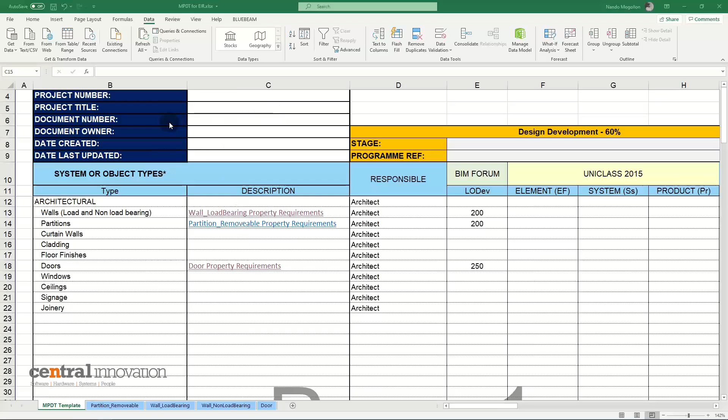So what we have here is a typical MPDT, a model production and delivery table that we've taken from the New South Wales Transport Department, which is publicly available. It's essentially a spreadsheet you can download. This is a fairly simplified version, and the only thing we've changed is we've added a few elements as an example of what the exchange information requirements will be for typical elements.

So right now we're assuming we're dealing with the architectural file, since this is the file we've been playing with. We'll need walls, partitions, and a bunch of other elements, doors, and so on, and they all will need certain requirements. The level of detail required is going to be 200, but that's only at design development. Later on that can change, and so on.

And they may require, let's say, a Uniclass classification system. This could be anything else — every country will use different ones. In Australia we also use NatSpec, and in New Zealand they also use MasterSpec, if I'm not confused.

And then all these elements will have specific requirements. One of the things I've done already is add those property requirements within the same table — this is very common. So if I've got walls, either load or non-load bearing, I have certain requirements that are actually in a different tab in the same spreadsheet. All I need to do is click on that, and that should take me to that page.

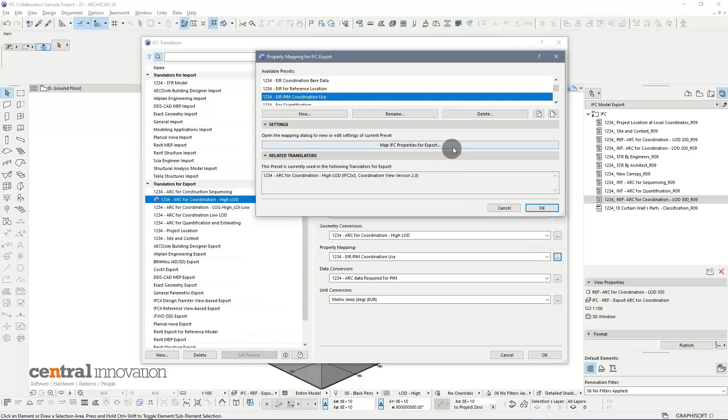So the first thing you want to do is go over to your translators, which I already have a shortcut for right there. I have the one that I've been using for this purpose of exchange for coordination. The one thing I want to focus heavily on will be the property mapping—this is where I control which properties will be mapped into the IFC. Click on the definition, and here we are.

Let's start with walls in this case. What I've got here is a list of all the properties available within the property set wall common. We're specifically looking for, well, it's 4 of them actually, or with partitions, that's going to be 5 in total. So we're looking for wall common, and the specific properties we want to bring in.

Combustible—whether the wall is of a combustible material; compartmentation status—whether it's part of a compartment for fire and smoke purposes; whether it does extend to structure; whether it's external or not; whether it's a load-bearing wall or not. These are the 5 properties we want to make sure are included.

So in order to do that, what I need to do inside ArchiCAD is go within your translator and then the IFC property mapping and look for those. I have those in here—combustible, it's right there. And the one thing you need to make sure is that this is actually linked to some property inside ArchiCAD.

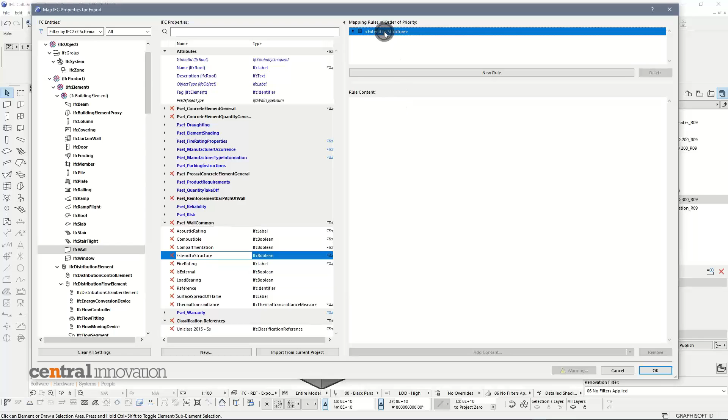Then we go into 2 that are not quite the same: external, whether the wall is external or not, and the load-bearing status. You'll see that they're not mapped in here, and the reason is because these 2 are actual attributes inside ArchiCAD. It might be confusing if you haven't done this before, but essentially for these 2, you don't need to map that manually, because whether the wall is external or load-bearing is part of the essential ArchiCAD attributes. I'll show you that in a minute.

Given this, what I can see from here is that anything with a link like so, including the acoustic rating and the thermal transmittance measure, will also be mapped into the IFC. As a rule of thumb, you normally don't want to throw in stuff you haven't been required to provide. So in a normal project, if I've only been required to produce these 5 particular properties, I will likely just get rid of this other data and make sure we don't overpopulate the model with information that may not have been required.

And we can map that later on if needed. So if you needed to do that with thermal transmittance, I'll just take that, delete that rule, and this particular parameter now won't be part of the IFC because it is not mapped.

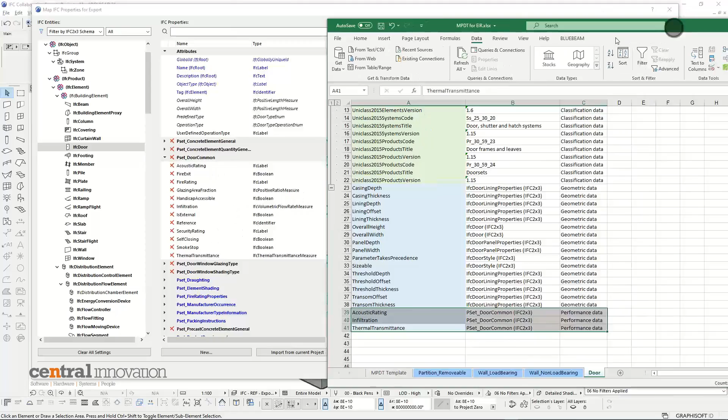You can double check those and map those whenever necessary. We're focusing on the ones that are strictly required by the BIM execution plan through the project information requirements and exchange information requirements. Similarly, I've got the acoustic rating, which is already being mapped to different things, including not only ArchiCAD properties, but other object properties that may require mapping.

Infiltration is similar, although infiltration is only an ArchiCAD property, and the thermal transmittance can be part of the library part or an additional ArchiCAD property.

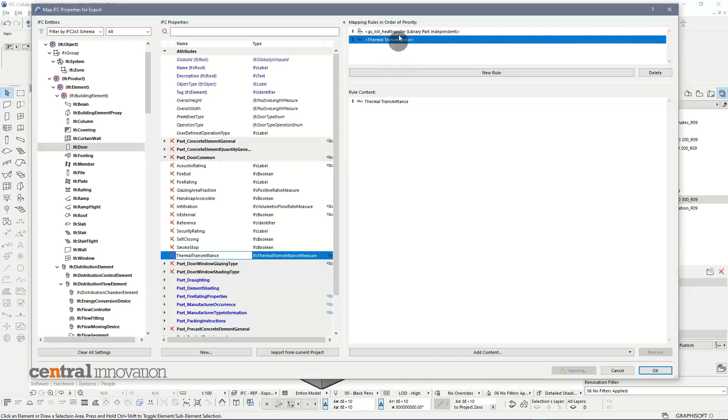When you have several rules in this list, ArchiCAD will try to grab whatever value it can take from the top to the bottom. The first value that populates the property is the value that will be used, so make sure you have the correct sequence for where to look for the value.

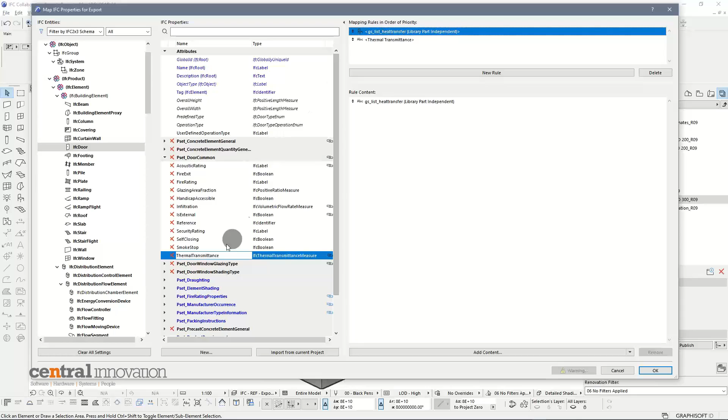Okay, so that's what you have when it comes to properties. If we have that mapped, the next thing that needs to happen to make sure that data comes out lives in the next setting, under data conversion of your translator for export. That data conversion will explicitly state that only the properties that have been mapped will be included.

And essentially that's what I just did - I've been including those specific properties that have been requested to include.

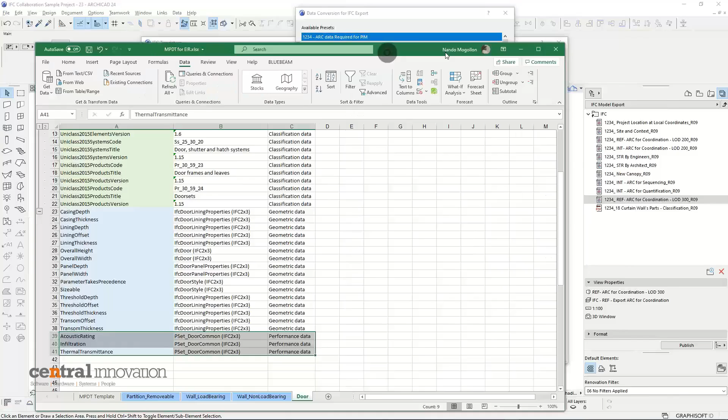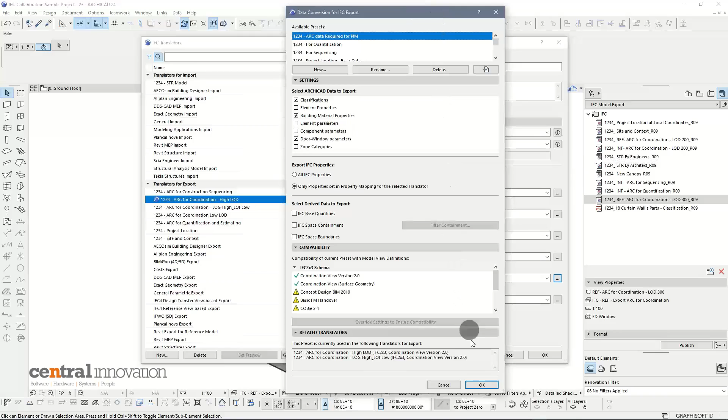Now, when it comes to this additional data, these so-called geometric data, that is included inside ArchiCAD when you simply click the door and window parameters in the case of doors. In the case of walls, they will be included whenever we jump in IFC 2x3, since it's basic IFC data. I'm going to click OK and click OK.

Now there are several ways, now that we've made sure we've got the data included in the translator, you may want to double check on the fly that the information is already there. In order to do that, you need to use the IFC project manager.

The IFC project manager will simply give you a live view of the IFC file with the data that is being mapped using that particular translator.

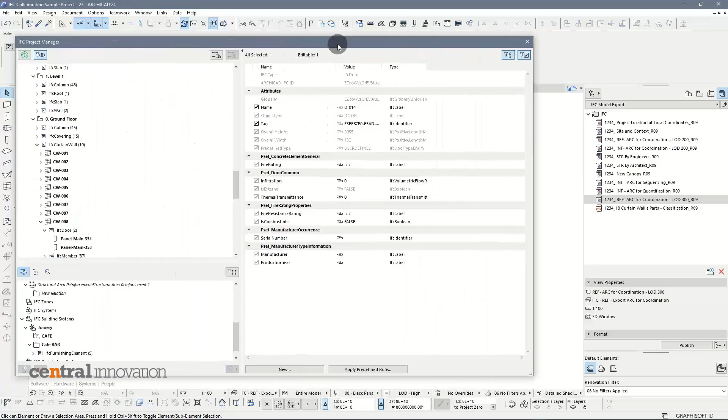So what I have in here is, for instance, all these partition walls. And if you activate these two buttons here in the top right, what you get is actually the values and properties that have already been populated within the file.

Note the following: in the case of walls, the properties combustible, compartmentation, and extend to structure are actually available for you to change from here. So you can override them, although the information is coming already from ArchiCAD.

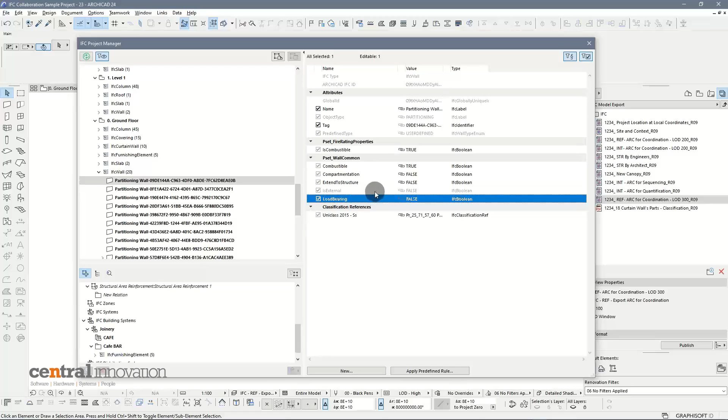But the properties external and load-bearing, since they are core ArchiCAD attributes, cannot be overridden from here, and are taken from the file itself. I'm also including the classification for Uniclass, which is something I've been asked to provide.

And similarly, doors will do the same. I've got infiltration, thermal transmittance, whether doors are combustible or not - I believe that was the other parameter - acoustic rating, infiltration, and thermal transmittance. Acoustic rating is probably the one I've got in there.

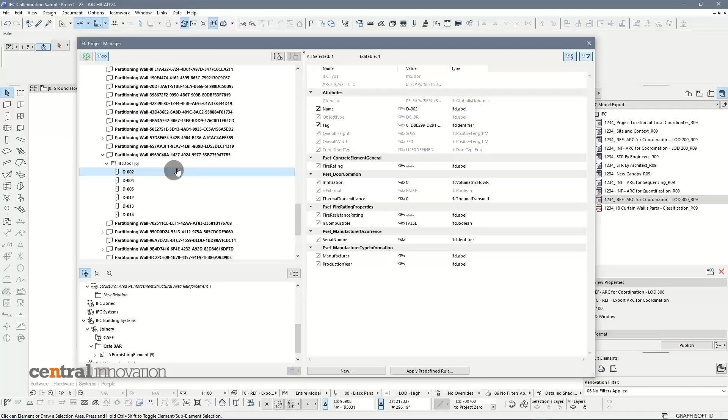I've embedded a few intentional mistakes just to show you which elements will comply and which will not. So you can check things with the IFC project manager one by one, like so. But honestly, this is not a really good way to audit the file, because then you're going to have to go over every single element and visually check whether the information is there or not.

So there are two better ways of doing that, and as you probably have seen already, one that I use heavily is simply the creation of schedules. For instance, I have a schedule here that checks the required properties for walls and partitions.

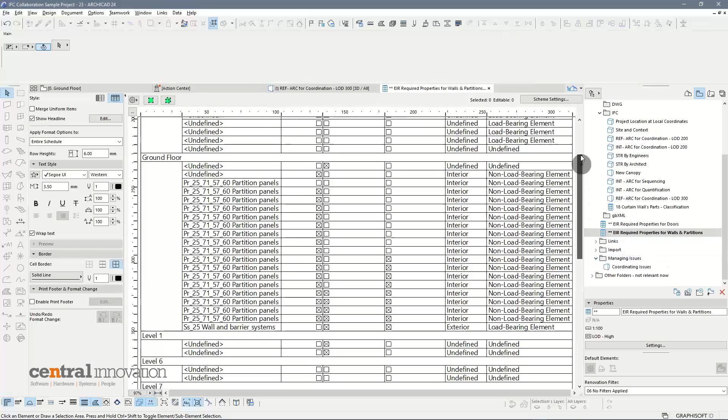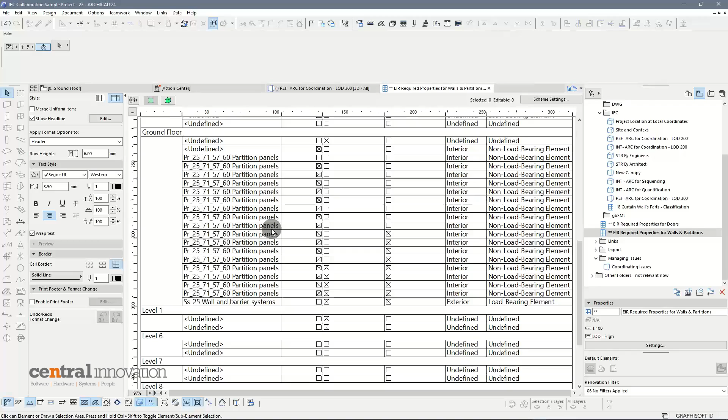If I double click on that, essentially this is already building up a schedule that checks the walls by level. Let me show you the ones I've already organized in here. I can see that I've got the ground floor, I have a bunch of partition walls in there, which are reading from the combustible, compartmentation, extend to structure, the position—whether it's external or internal—and the structural function. It's reading through that, so it's giving me the data that I needed. Whatever I need to change, I can change it from here directly without having to go to the model.

Same thing for doors and windows, essentially classifying them with the Uniclass classification system, or not classifying them, just to show you how they come up as an error, and then listing the data that have been requested to include. So whether you include the data here or not, that's essentially part of filling up those requirements. So when you exchange the model, it comes up with the required parameters.

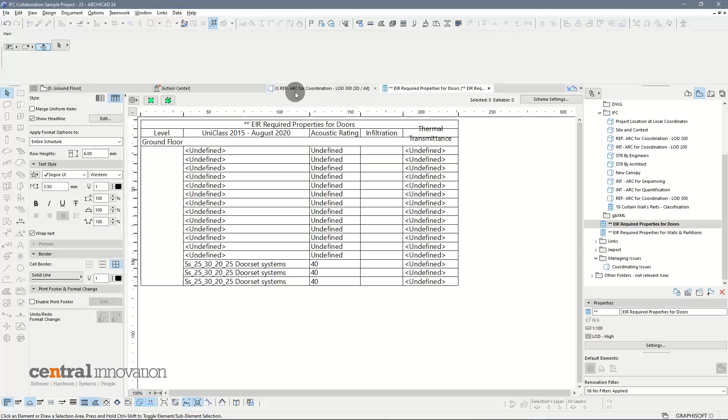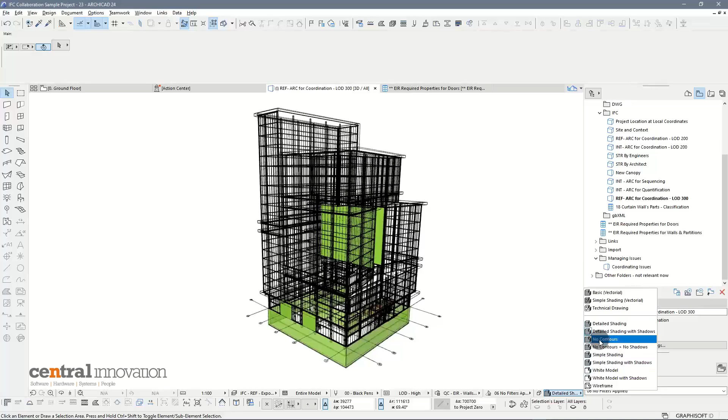If there is another way to visually check globally what is happening with the file, that will be essentially checking the entire file with graphic overrides. I'll show you a quick sample of that, let's do it again. Let's say you want to check the walls for the combustible property. All I need to do is switch to that filter. I'll show you what the settings are in a moment, and set this to not show me the contours so I can clear up the visualization in here.

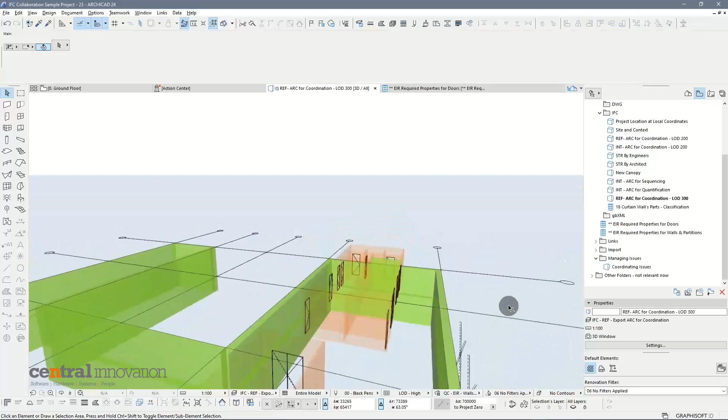What you get in here is in green all the walls that are not combustible, and in that semi-transparent orange I've got all the walls that are combustible. So I can see that all these partitions seem to be combustible except for that one there in the middle. That might be a mistake, but at least you get a general visualization that gives you an idea of whether this is right or wrong.

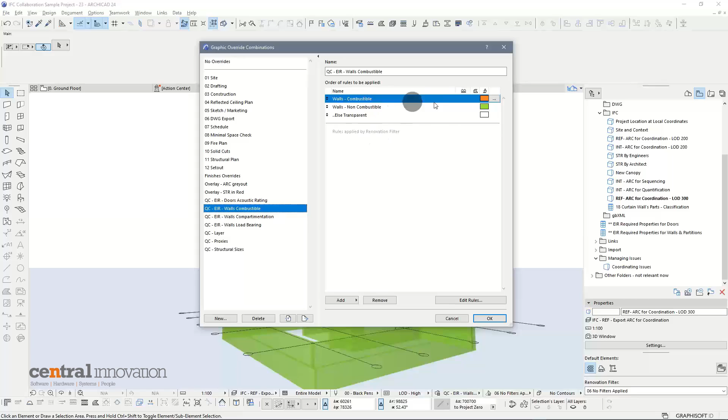The way you do that is simply by adding individual rules, and these rules are essentially looking for the same parameter that you decided to map back into the IFC. It's a simple matter of going: if the parameter is true, give it a color, if it's false, give it another color. Essentially what I'm doing here, if it's true, then it's going to be orange. False, it's going to be green—just the non-combustible.

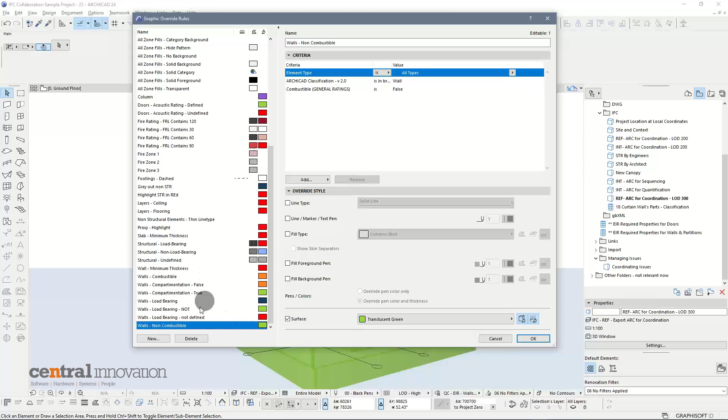And I can do the same thing with compartmentation, fire rating, etc. Compartmentation is very similar—these are the walls that are meant to be part of a compartment, or walls that are load-bearing, not load-bearing, or don't have a classification for the load-bearing settings. So all of that can be added to your quality checking graphic overrides, and they can visually give you an idea of the current status of the file when it comes to property requirements.

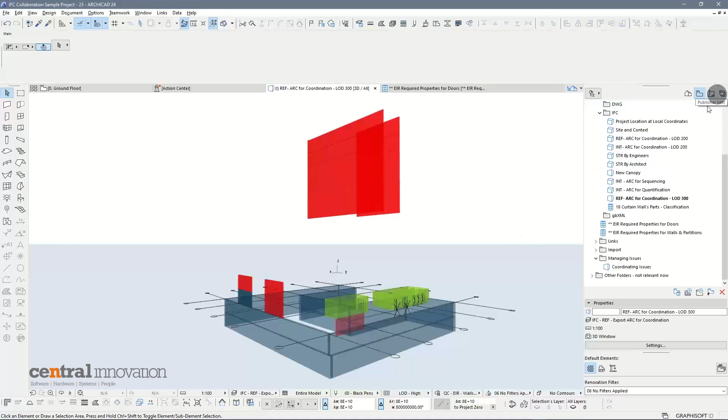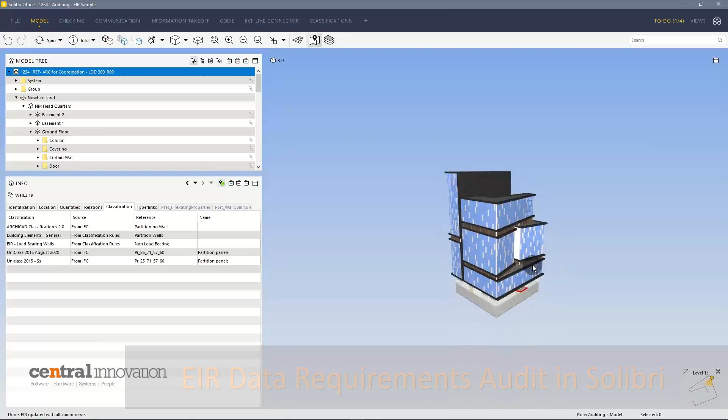Now, I've already exported this IFC, so we can double check this back in Solibri. I'm going to jump ahead and open Solibri. Okay, so we're now in Solibri here. It is the same file, just in IFC format, exported just a minute ago.

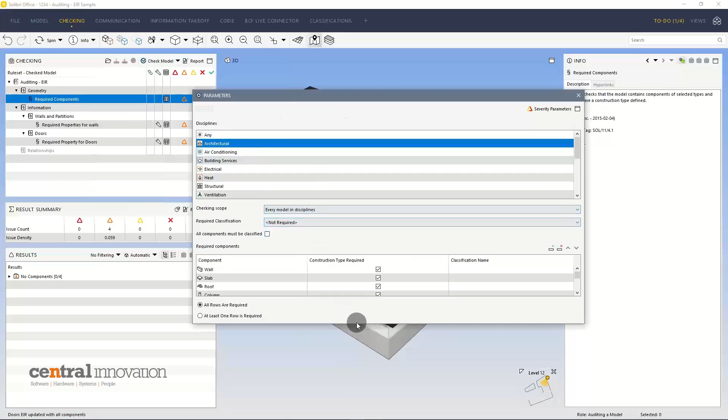Within here there are a couple of things you can do. First, if you have Solibri Office, you can run a series of checks within Solibri. I've already built mine in here, essentially built on those groups of requirements we started to talk about: the geometry, the data and information, and the relationships. I've focused essentially on the information with those two examples, walls and doors, but I also checked required components. So within required components, I said you need to give me a wall, you need to give me a model that comes with a series of elements. Now I've got walls, slabs, roofs, columns, and so on, which is something I can manipulate, assuming that was the requirement.

And I know this model doesn't contain a lot of that—it doesn't contain windows, for instance. So when I check this rule, it will tell me, look, you have no beams, no stairs, no spaces, and no windows within that, which is fine, since this is exactly the kind of model I've been putting together, and I was expecting that to happen.

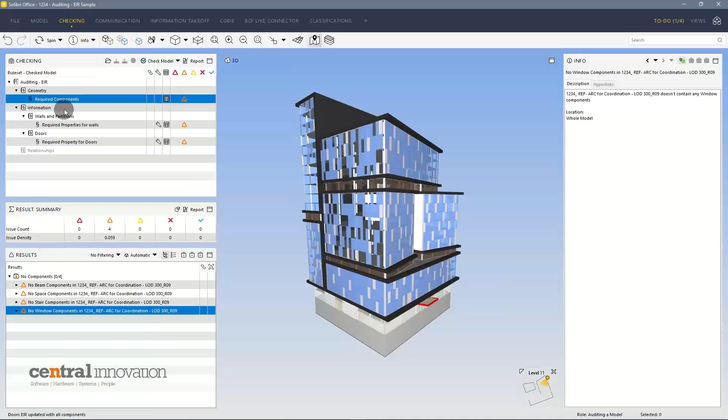When it comes to the information, though, I can use a particular rule inside Solibri that checks for those specific parameters. So checking for the exchange information requirements for the project information model, it's a matter of selecting which element type you're checking against, and saying: look for those walls within the property set wall common, I need the property combustible, compartmentation, extent to structure, and whether it's load bearing or not. Given these parameters, we'll go and find those items.

Similarly, I've done it for the property sets within doors, checking infiltration and thermal transmittance. If I need to add anything, say I need to add within door common—thermal transmittance is already there. Let's say you want to do one more double check, the geometry, that geometry data.

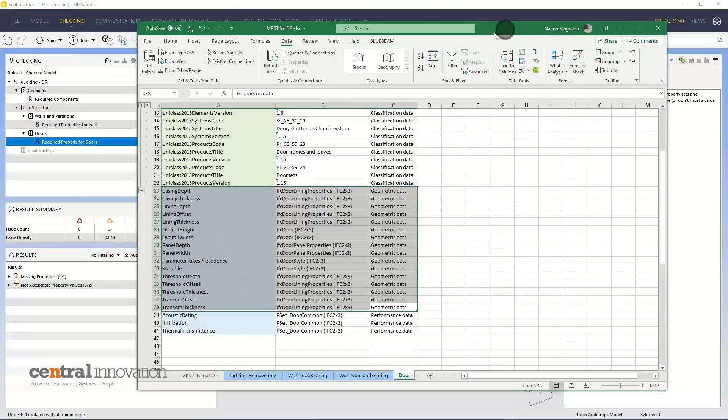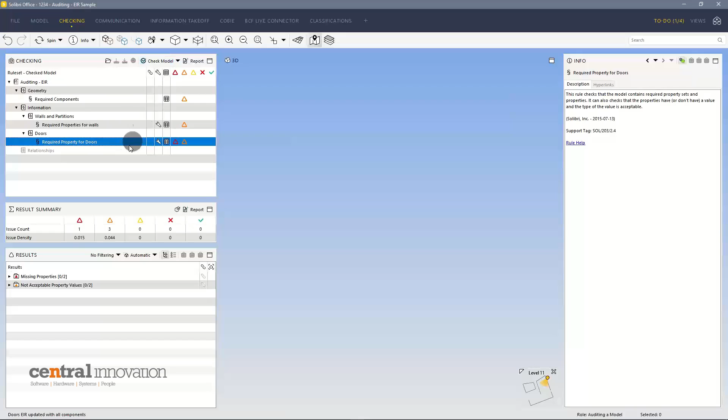Let's say we want to have this lining thickness, or let's say we have the casing or the panel width, for instance. You just need to make sure that the panel width exists with any value. Doesn't have to be any particular value, any value at all. Then you can go ahead and check the model. This will come up with some results.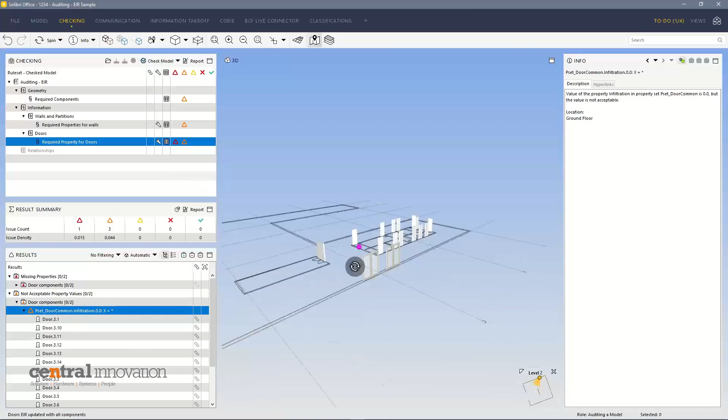Missing properties is telling me, look, door components don't have the panel width parameter because I didn't include that. I just made that up right here. But then it will also give me other values in here, like for instance, these doors do not have the infiltration parameter. Although they have the parameter, they may not have a value for it. So for instance, infiltration comes to 0 rather than an actual value that should be accepted.

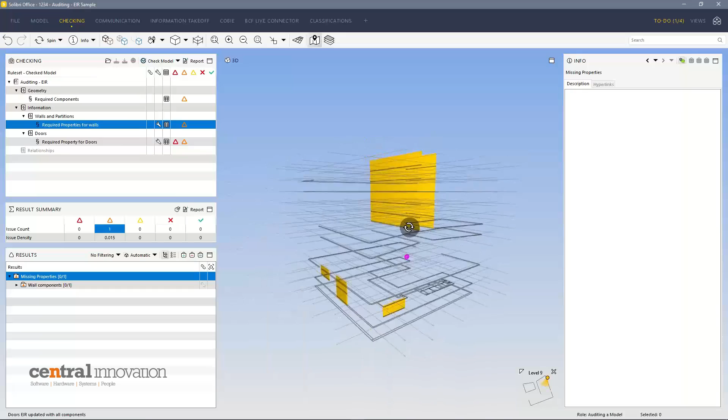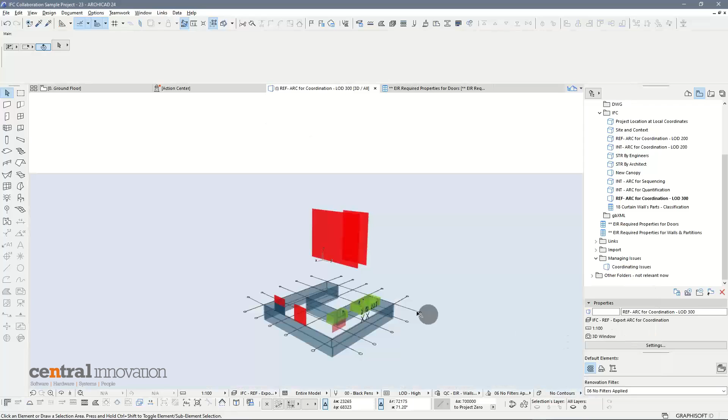So with this, you can actually check which elements do not have some of the properties. In this case, this is telling me, look, couldn't find load-bearing settings for those, which is similar to what we had in Archicad when I was checking the load-bearing status in here. So if you see that, these red elements in there have no status for load-bearing, which I knew about prior to exporting the file. So this one is essentially telling me the same thing, but on the IFC side. So you can check things before and after that.

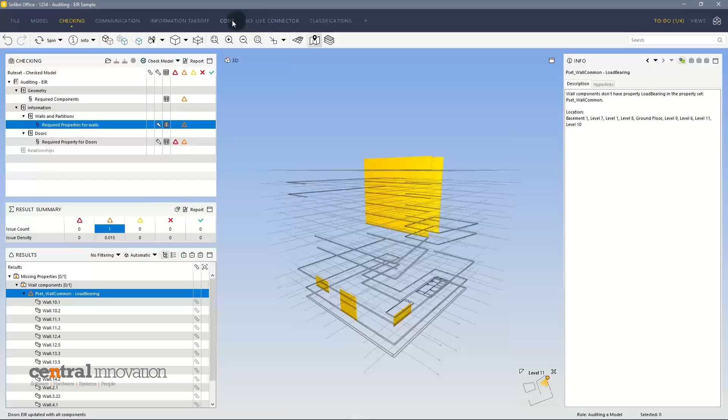The thing that makes Solibri a really powerful tool for this kind of auditing is that you can go beyond that and start double checking these based on schedules. These schedules can allow me to double check, super quickly, the status of the information requirements for doors. For instance, this one is a list giving me the infiltration property, the thermal transmittance property, and whether the door is external or internal, essentially telling me the story all at once,

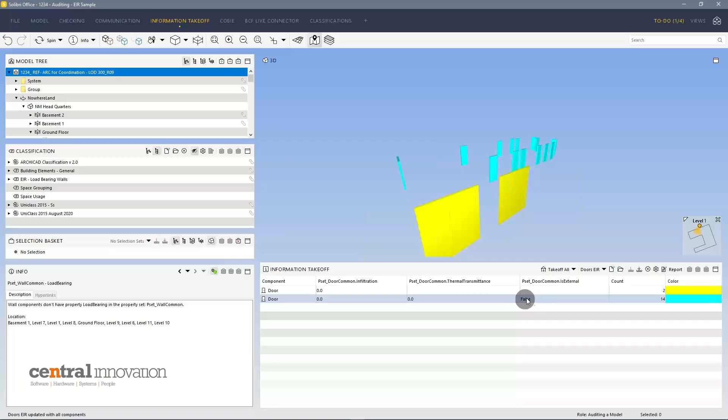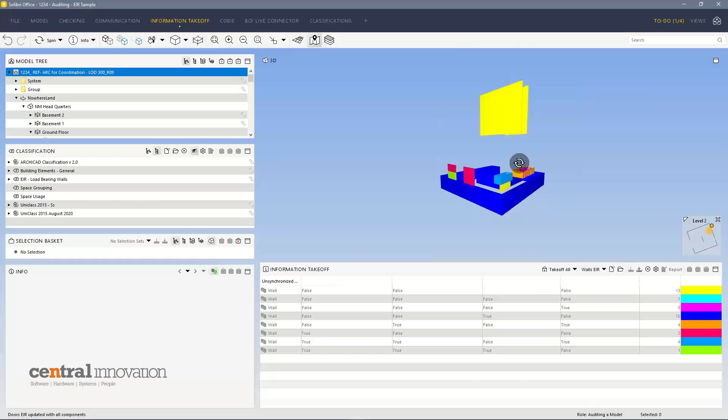saying, look, these yellow doors have no values for most of them, and the blue ones, I know that they're internal. Their IsExternal property is false, but they have no values for thermal transmittance and infiltration, so I can come back and populate those values if we need. Same thing for the walls. I can build rather quickly a graphical feedback coloring the model right away, telling which properties have been populated and what their values are, and it will color code them.

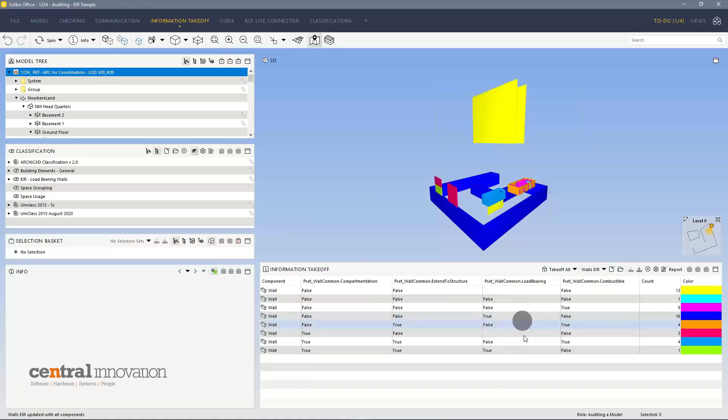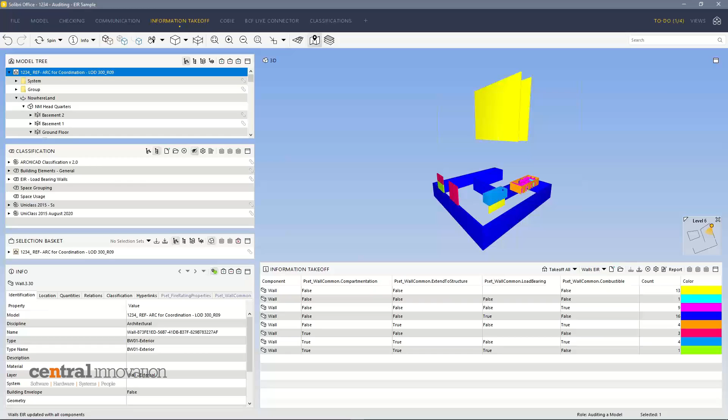So this will help you rather quickly evaluate the status of the model when it comes to properties. Out of this, you can create a report and send information back to Archicad, or to whatever discipline or author of the model, just by checking via rule sets, the way I did it in here, or simply by creating schedules that will populate the 3D window with a color-coded setting. Then you can quickly check the values of those elements based on those properties.

Okay, so we've run out of time already. I hope you enjoyed the webinar and it was informative for the purpose of auditing models when you need to comply with certain project information requirements and exchange information requirements.